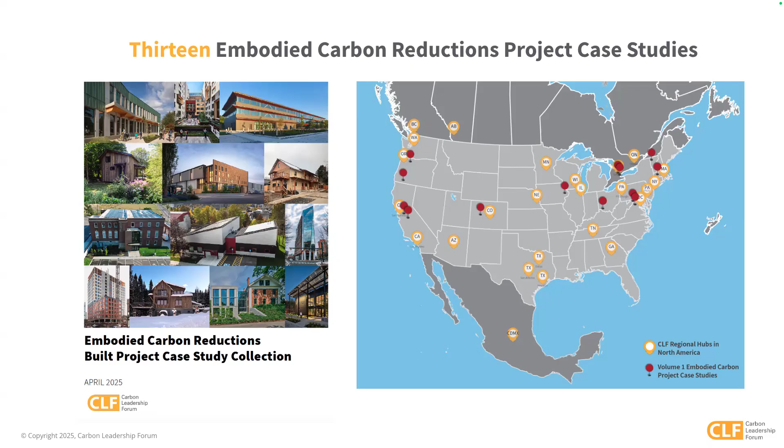So we are really thrilled today to have team members from all of the projects covered in today's webinar. They'll each be sharing their own insights and experiences and their roles on their projects, and in particular, a focus on the process that they undertook to assess embodied carbon and realize reductions in a whole number of different strategies. So I will let each of the presenters briefly introduce themselves when we get to their project.

So the agenda for today is that myself and Sindhu will start with a really brief introduction to the goals and the process of publishing these case studies. And then each project team will give a relatively short presentation. At the end, we'll have time for a Q&A with everyone. So if you do have questions, you can either put them in the chat as we go. If they're easy enough for presenters to answer in the chat, they can do that. And then otherwise, we can hopefully have some time for a conversation at the end.

So I just quickly wanted to put out there why CLF undertook this first ever effort from our organization to publish project case studies, and just kind of understand what some of our goals were for doing this.

So we really were seeing a lot of demand from practitioners, from owners, for real world examples of projects that had been built and demonstrated embodied carbon reduction. So we really wanted to try to do something to meet that demand that we were hearing.

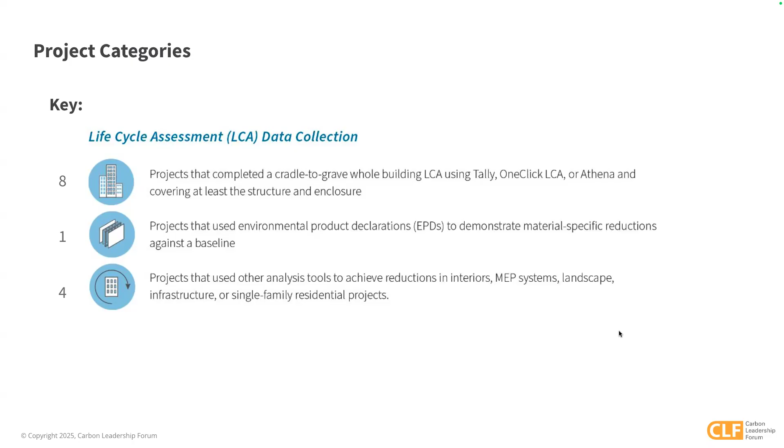I'll pass it back to Michelle to continue introducing the case studies.

Thank you, Sindhu. So as Sindhu explained, you can see that we really got a very wide range of project strategies and types. Most projects used more than one strategy, so it was a really exciting cross-section of many different ways that you can address embodied carbon.

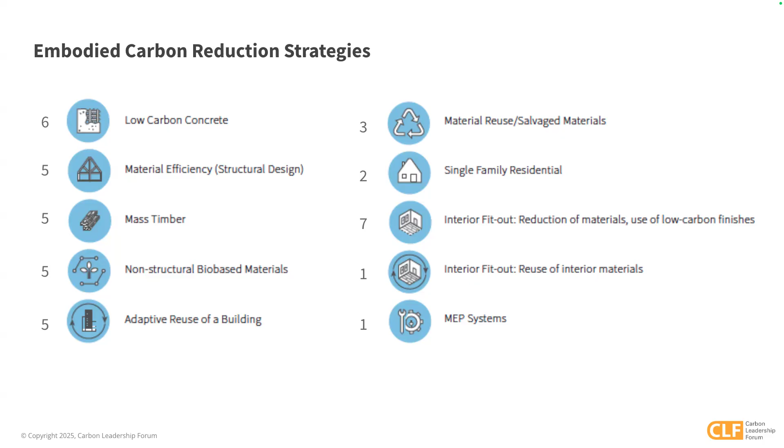We had studied it on a number of projects, either on our own or through the lens of a third-party certification. But Amherst College had just committed to carbon neutrality for their operations by 2030, and they are actually in the process of building a campus-wide ground source heat pump system that's going to power the heating and cooling of all their campus buildings. So they're really walking the talk. This was the first capital project they had embarked upon after making that commitment.

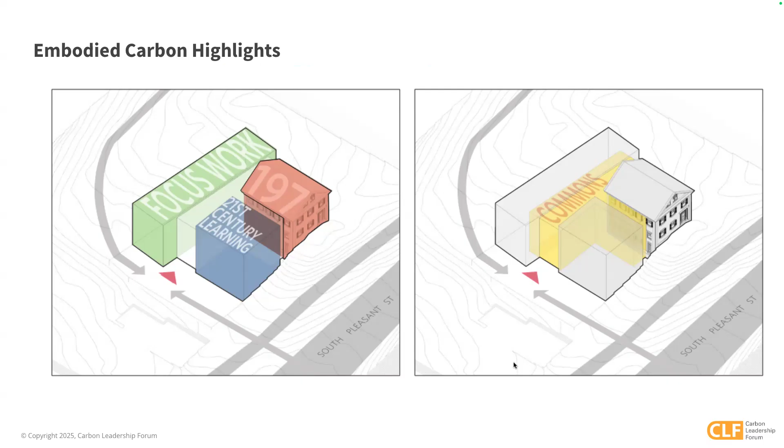Yep, here we go. On the right-hand side, this is where we were able to take advantage of doing some double height space and really use mass timber and express it. Mass timber is fantastic from an embodied carbon perspective, but can be very deep structurally, so we used it in the spaces where we could really accommodate it. On the left-hand side, we used a combination of CLT deck and steel, and set the steel up into the thickness of that CLT deck so that we can make a space that's still institutional scaled, but can meet the floors of the existing building.

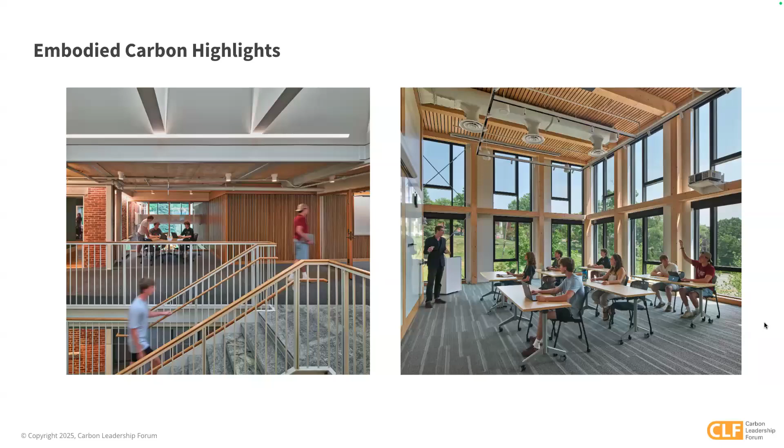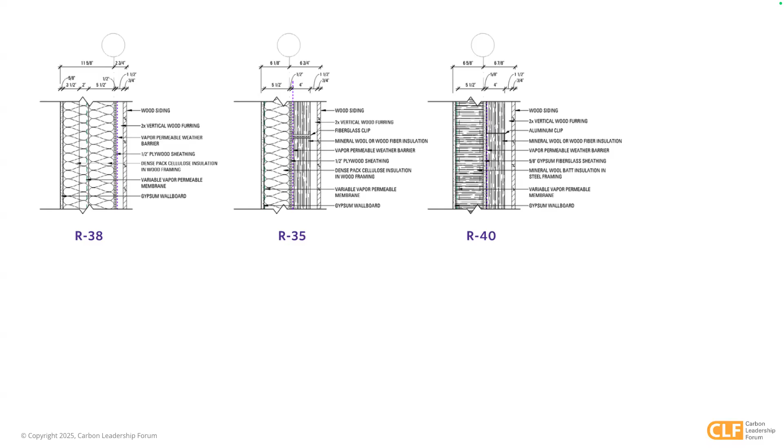If you click one more time, you'll get the preliminary results that we were able to use and work with both our client and our client's envelope consultant, who was very interested in the option on the right. We were able to work with them to figure out how to get to the option all the way on the left and accommodate some carbon storage in the material choices. We had to work through a lot of building science too, to make this wall actually durable. But it allowed us to make that case really strong. So, next slide.

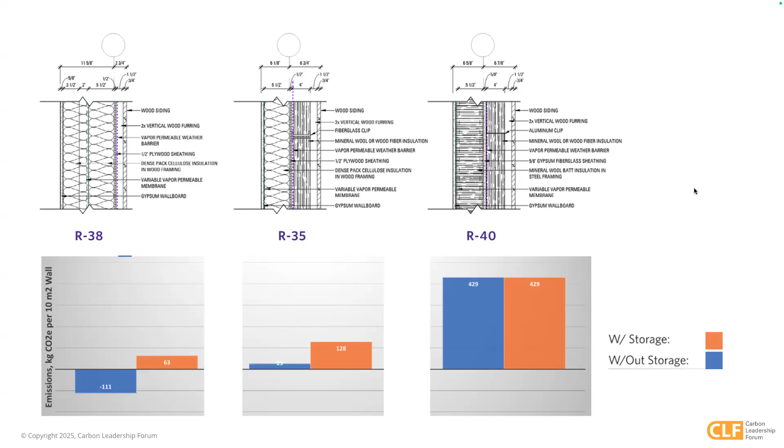We used a bunch of different tools to do this study. At the very beginning, we worked with Beam Tool to do overall analysis. We used Tally during the design phases. And then at the end, we were able to study the interiors using EC3, comparatively picking which products we were going to use. We really focused on the A1 to A3 product stage, because that's the best and highest quality information we have so far.

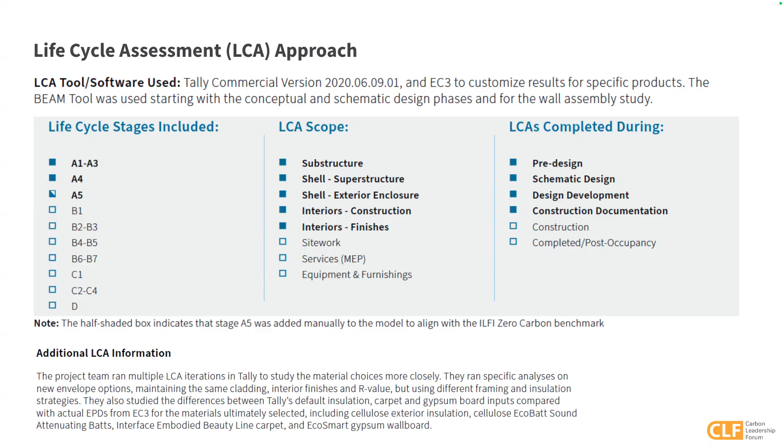And then our results. Like I said, we were asked to consider both operational and embodied carbon on this project. So we were naturally drawn towards the ILFI zero carbon standard as a potential third party certification process. Ultimately, we didn't certify the project, but it helped us set really good goals for both of those performance metrics. You can see the savings that we were able to achieve based off of some baselines. And based off of the benchmark of the challenge, we were still able to achieve major dramatic reductions from that requirement. Next slide.

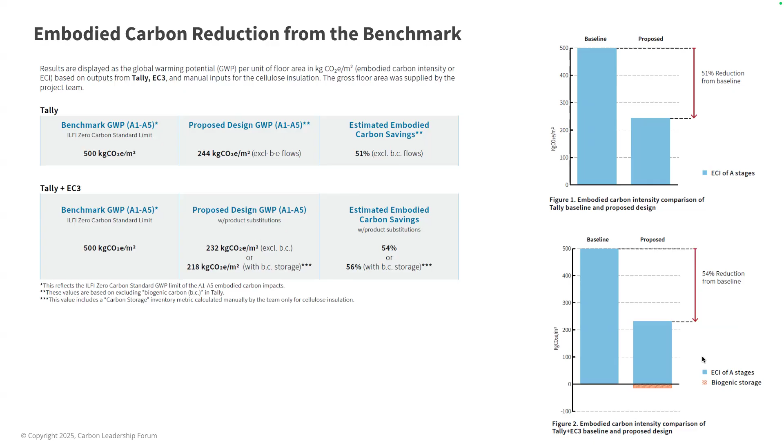So I guess in conclusion, there's a couple of key things. One is that we've thankfully been able to play in this realm for about a decade now, but we're a heck of a lot better at it than we were 10 years ago when we were just trying to figure out how to use the tools. Tools are also a heck of a lot better, and the libraries are getting much better, in no small part due to organizations like the CLF organizing things like this to share that knowledge.

We're at this tipping point where I think we can actually start to trust the numbers now, which is really quite neat. And then the last thing is that this was a really unique situation where we weren't just trying to meet a standard. We were actually being asked by our client directly to study this, which was very fortunate for us, but also really pushed us to consider some things we may not have. It allowed us to partner with folks like Jacob and our other teammates along the way to push ourselves to do better through our design. So, thanks. I think that's the last slide.

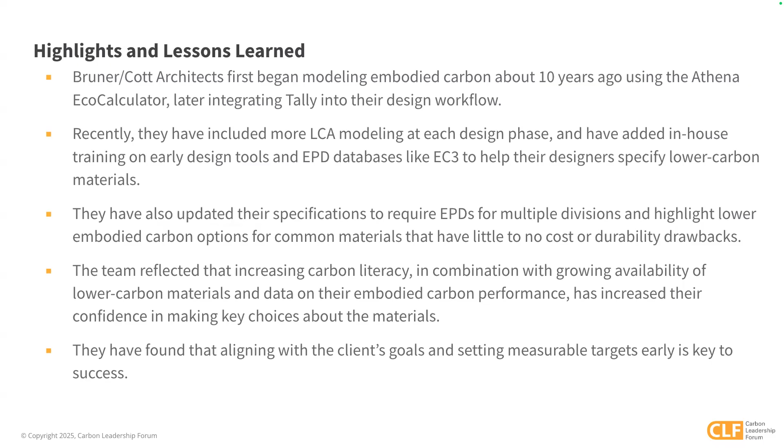Thanks so much. Yeah, Christopher, just wonderful to hear you present on that project. It's thrilling, and I'm honored to be able to share some of New Frameworks' work. I work with New Frameworks, a design, build, and fabrication cooperative located up in northern Vermont. And we have a small residence, the Kaplan Williams residence. Next slide, I'll tell you a little more about it.

So this is a small 1-bed, 1-bath ADU, accessory dwelling unit, that is actually located in the backyard of a residence right in the city of Burlington, Vermont.

The family that was in this residence needed to expand, couldn't really afford to move to a larger home, and in addition, wasn't really the right call for that building.

So an accessory dwelling unit solution became available with changes to Burlington zoning policies that allowed ADUs to be permitted in the city of Burlington to increase housing density in residential sections of the city. We were really excited to provide an ADU solution for this growing, or evolving, family. It also marks a new foray for New Frameworks into prefabricated and pre-designed panelized full home construction, which I'll talk a little more about.

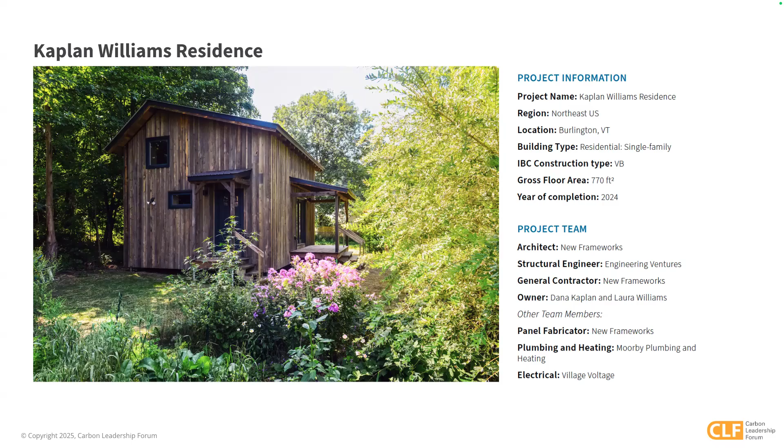So yeah, this is a wee little 770 square foot, single bed, single bath, very lovely and comfortable ADU.

So I'll call out some of the particulars around the construction, and then I'll talk a little more around the panelization and the business model part of it in just a minute.

Compact home is a really big thing. We're really big fans of sufficiency within our company. Often we'll have owners come to us asking to see how much project they can get for their budget, and we typically pivot the conversation to what is the minimum amount of building you need for your programming. That was an ethos that guided the designs of our pre-designed homes, and it feels super relevant in terms of the overall net impact of emissions.

Helical piers are a thing we have really adopted both as a resiliency strategy in our heavily flood-prone regions of Vermont. We're fast approaching, actually we might be on the anniversary of catastrophic floodings for each of the past 2 years. So we've been leaning into flood resiliency approaches as well as foundation designs that minimize the use of concrete.

The panelization work allows us to bring in straw as an insulation material and to work with local wood in a really cost-effective manner. I'll fill out more of that story in the migration to panelization in our company, but we're able to use organic straw as an ag residue for the insulation for the majority of the buildings, so wood fiber insulation, and we go pretty far out of our way to source locally milled wood products from sustainably managed forest lands whenever possible.

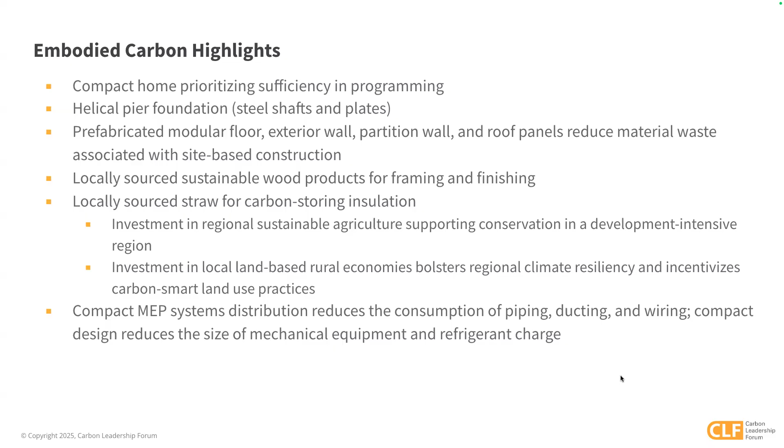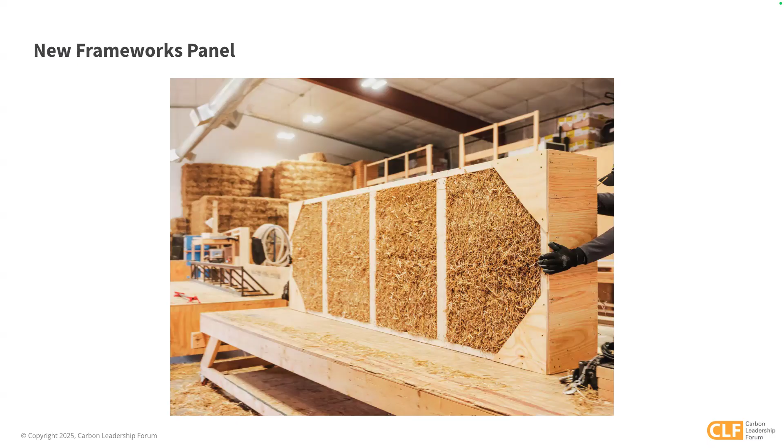Just want to give you a picture of what a straw panel looks like. For all practical purposes, you can just think of a double stud box stuffed with straw. So if that's your walking-around mental model, what we're looking at here is the interior that is ultimately covered in a vapor variable airtight membrane. No one need know there's any straw in the box if that proves more of a liability or concern rather than an asset. In our case, it's an asset, so it's an effective way to store biogenic carbon in the built environment. We lean into that while also supporting local organic farms within our supply chain and working with a working landscape conservation model in our rural communities. But there's a picture of a straw panel in case you were confused as to what that is.

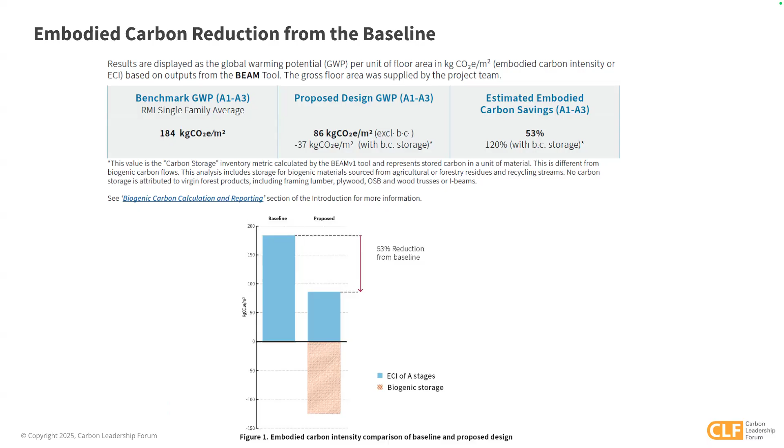So I guess just to wrap up with the lessons learned and highlights here, I won't read through each one. I touched upon the more technical details a couple minutes ago. The thing I'll name is that New Frameworks made a really intentional choice a number of years ago, maybe close to 5 years ago, to pivot from being custom design builders doing all custom construction to becoming a fully panelization company.

That pivot from custom construction to prefabricated construction, combined with our design team's work, has allowed us to deliver high performance carbon storing building solutions at a much lower cost point with way less friction to way more clients. It's been really exciting to see how the combination of prefabrication, high performance construction, and local bio-based natural building technologies have all been able to optimize in these pre-designed and fully panelized homes, such that we're able to meet the demographics of our working class rural communities, using local materials and providing carbon storing buildings. I'll leave it there.

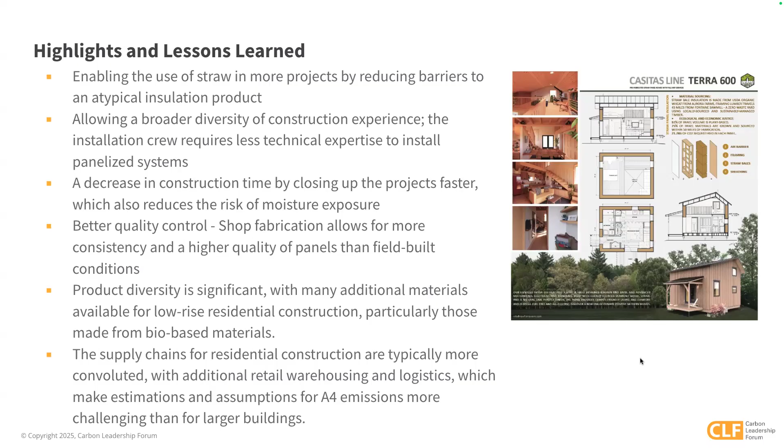So staying on the theme of bio-based materials and straw bale construction, I will hand it over to David Arkin to talk about Oceanspray Townhomes.

All right, thank you Michelle. Thank you everyone for joining us today. I'm a principal at Arkin Tilt Architects based in the San Francisco Bay Area. Part of our Bay Area CLF chapter, I was with CLF early on as a co-chair of the Renewable Materials Task Force. So early on, CLF had a focus on these carbon storing plant-based materials. I've also served 10 years as the director of the California Straw Building Association, the AIA's 2030 commitment, and represented AIA on the ECHO project.

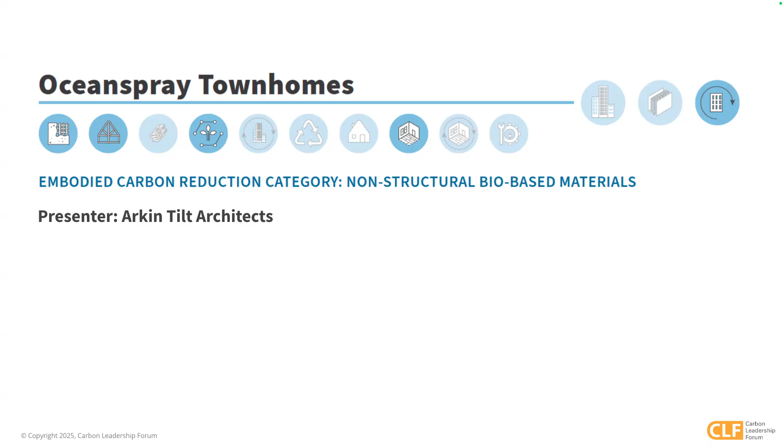Today I'm thrilled to talk about a recently completed and occupied project of ours, the Oceanspray Townhomes in Ashland, Oregon. It's a 2.5-story, 4-unit development. What you might call the missing middle, in that it's that low scale, mid-rise infill housing in a largely residential single-family neighborhood, but adjacent to Southern Oregon University where there is some student housing in the area. I think it represents the right scale as well as a number of carbon storing and other features in addition to the story we're about to tell.

The project does feature 7.2 kilowatts of photovoltaics, so it is zero operating carbon, and also has a 10,000 gallon rainwater storage, which the units all use for their toilet flushing.

So just to highlight some of our embodied carbon efforts, I think most significantly, and Jacob outlined this well with their project, the ability of straw as a plant-based resource to store carbon cannot be understated. We grow enough grain straw worldwide, I think it's 2.16 billion tons, which is enough to not only replace all of our insulation materials, but in doing so, we would offset all of the global transportation emissions. So we're quite excited about this particular resource.

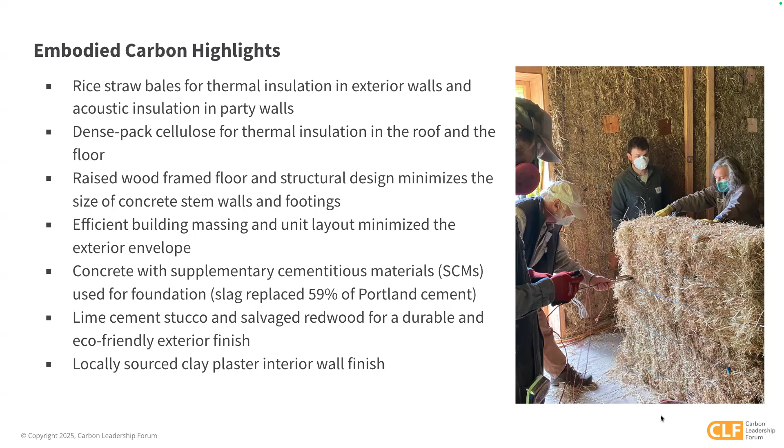I think the most significant story here is perhaps around the concrete, where we worked closely with the concrete subcontractor and the local supplier who had never done a low carbon concrete mix. Using some other information from the Portland area and state of Oregon, we convinced them to do a sample using a 59% replacement of Portland cement. In preparing that sample, the concrete subcontractor not only found it more workable, but really became an advocate for these low carbon concrete mixes. So that was an exciting win for the whole team.

So our focus was largely on the upfront carbon emissions. Like the new frameworks project, we use the BEAM calculator, that's building emissions accounting for materials, and we find it a very useful tool for this scale of building. We go into a project with some understanding of what measures are most effective, then do that measuring once we're in construction documents and can make choices to further reduce those emissions. Again, we focused on A1 through A3, but that's where the bulk of the emissions for the entire life of the project take place.

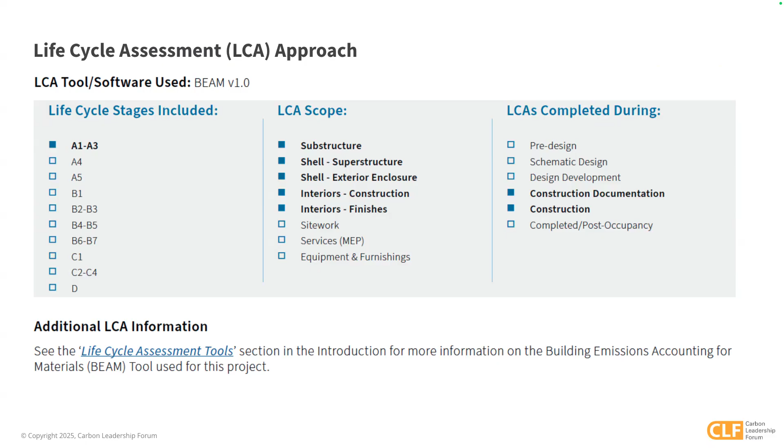So looking at the reductions, I think there are two points to be made here. The first is that our modeled baseline is starting a lot lower than some of the others we've seen here, and that's again due to that envelope efficiency and some of those design measures taken. Then with the lower carbon concrete and some other choices, we're able to achieve an 18% reduction.

But when we look to the biogenic storage and start at an average of 200, we're actually looking at an 87% reduction when we account for that biogenic carbon. I think the second point here is that these bio-based resources are storing carbon now, and that's when those emissions are having the greatest impact on our climate. There's a lot of discussion of what happens at end of life, and I think the options of reuse or biochar need to be considered seriously.

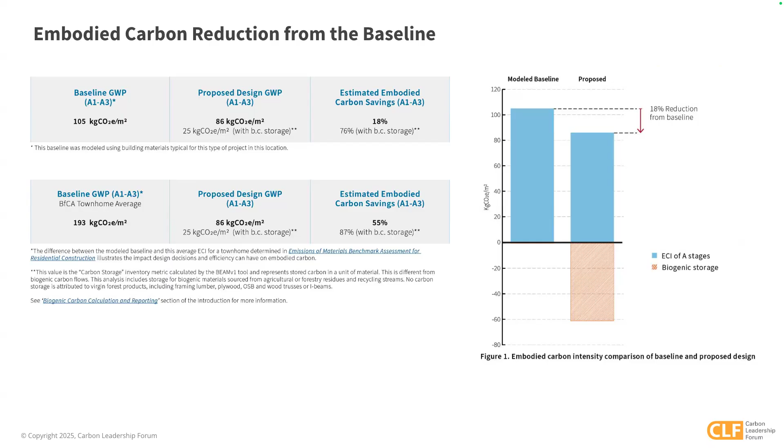So just to wrap up with our highlights and lessons learned, I think we found that we could bring this bio-based resource to a multifamily scale. The wall system was embraced by the contractor, who had actually never built with straw bale before. Our clients were on board mostly for its thermal performance, but also with our efforts to reduce embodied carbon in all the different ways, including integration of salvaged wood resources. I think we're really looking at this as a demonstration to take it to larger scale. Jacob mentioned panelized construction, but I think these hybrid systems like we used here can also have a role in long-term reductions. Thank you.

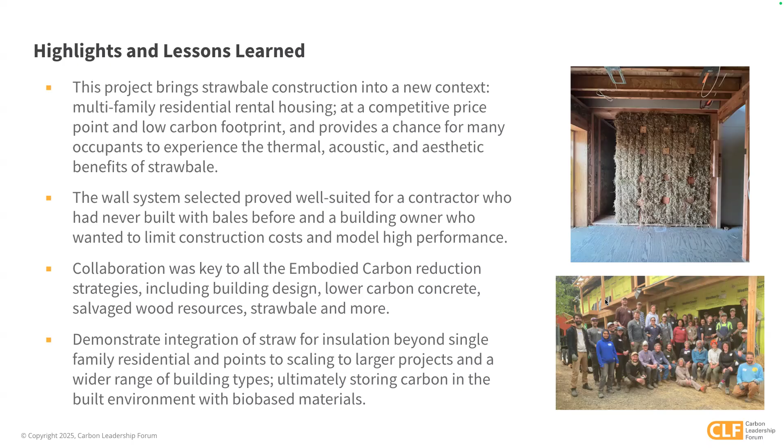Great, thank you so much, David. Really fantastic to hear about this project.

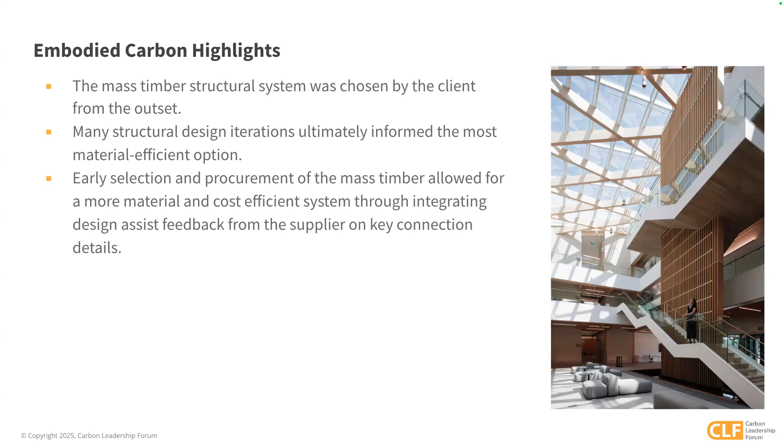For the LCA, we used One-Click. We ran it from A1 to A5, on the envelope and structure. It was completed post-occupancy, with the shop drawings and completed building drawings, which was very interesting for us because during the design period, we worked with a group from University of Toronto who had done a quick bay study, an embodied carbon bay study, during the design process. It was interesting to see how the full building post-occupancy LCA was telling us different things or matching in some areas - it was a good process.

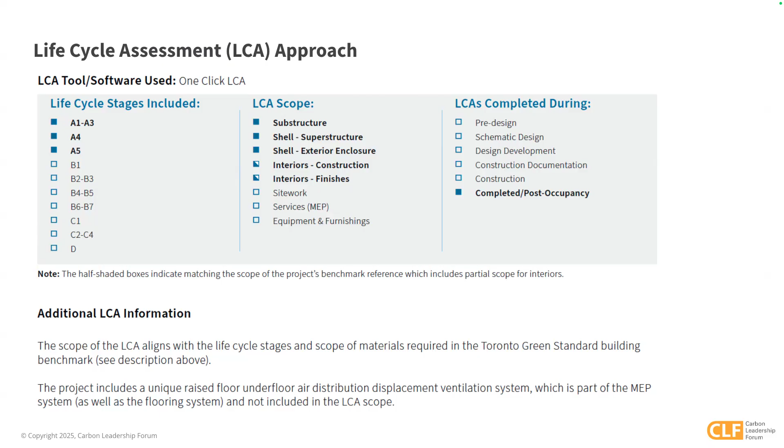It's also interesting to note that we used CLT for the exterior wall backup in some areas beneath the glazing, and that also helped us reduce the embodied carbon compared to your typical exterior stud wall framing materials, which we found to be beneficial.

In terms of the baseline, the city here in Toronto has a Toronto Green Standard guideline, and it's a tiered standard. Tier 2 benchmark is 350 kilograms of carbon per meter squared. Tier 3, which is more restrictive, is 250. This project complied even with the more restrictive tier at 205 kilograms of global warming carbon emissions per meter squared - better than tier 3 by 41%. If we include biogenic storage, that's another 140 kilograms of carbon reduced, bringing us down to about 66 per meter squared.

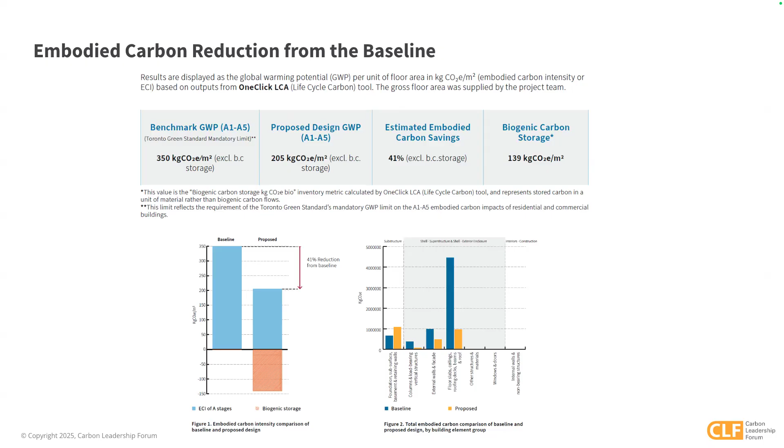One of the lessons learned is that the concrete and the steel were major contributors to the embodied carbon. I'm sure everyone here could have anticipated that.

Some of the more nuanced outcomes were that we had awnings to reduce solar heat gain. We wanted to provide a lot of daylight for the building's occupants, reducing lighting loads, but we also wanted to control heat gain. The awnings were a way to control that, but the embodied carbon cost for the framing of those awnings was something we wanted to be mindful of. Going forward, we'd like to understand how much the mechanical units were downsized due to avoided cooling costs, and really compare that to the embodied carbon for the framing of the awnings. Once we get a bit more data available for the mechanical side in terms of EPDs, I think we're close to being able to run that analysis.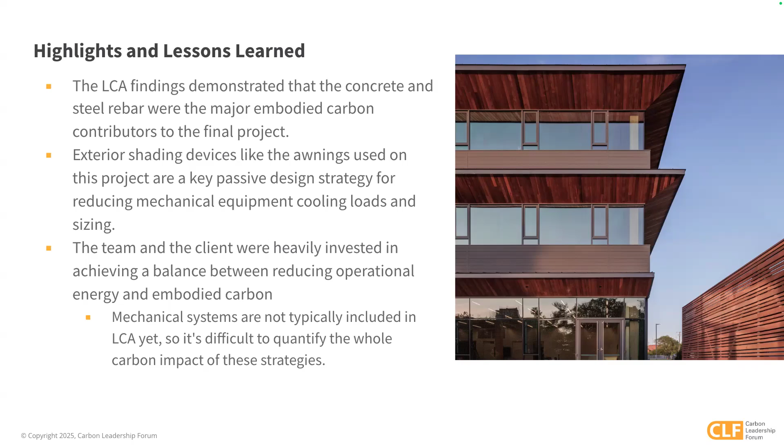Great, I think that's the last slide. Oh.

Just a final note, it was kind of great to work with clients who were focused on a number of metrics - financial responsibility and sustainable responsibility, but also care for the building's occupants. Mass timber really helped achieve all of these metrics, low embodied carbon and low operational cost for the users and the owners. It was interesting for us to participate in that process.

So thank you. Great, thank you so much, Kathy.

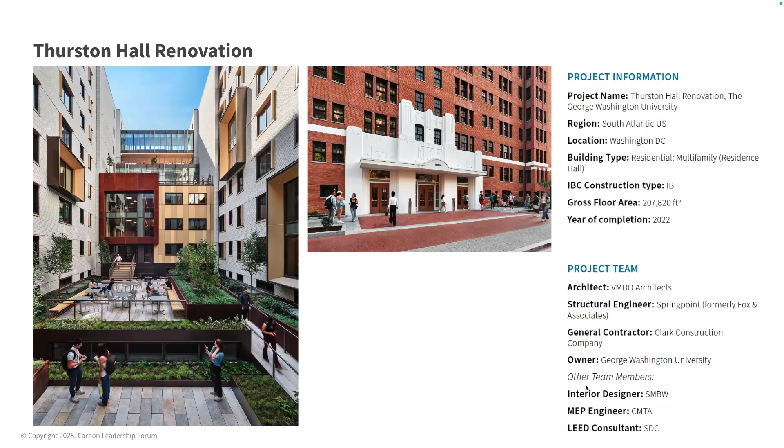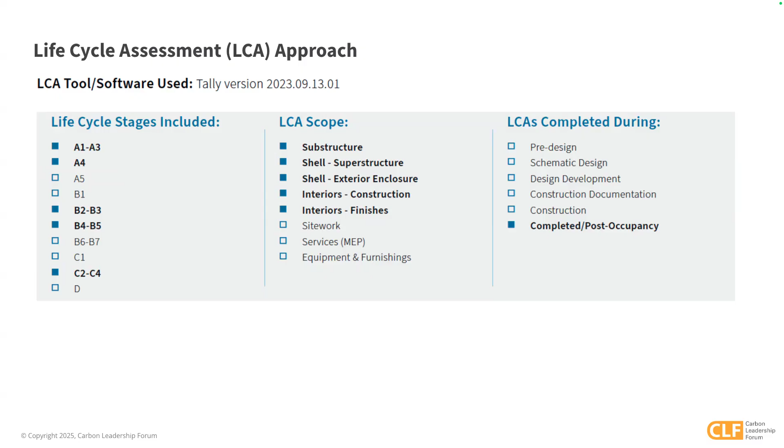So it's really successful in that way, but from a carbon standpoint we didn't do anything special. At VMDO, we've been doing a firm-wide study of all our buildings looking at embodied carbon, and Thurston was one of the projects we ran through Tally just to see how we're doing as a firm, and what it looks like when we're renovating buildings. We ran it through Tally looking mostly at A1 through A3, but included some other scope as well. What we found was really exciting.

This gets a little technical based on how you define your baseline. The baseline in this case is: what if we built Thurston Hall, 1929 style with brick masonry bearing walls, today? That would be your baseline GWP. And we had about a 29% savings over that baseline.

But what was really exciting to us was looking at our new builds—what would it be like if we built Thurston new? There you're looking at about 607 kilograms of carbon per meter squared compared to 272. So by just reusing the structure, we were making really huge improvements compared to the alternative. That was super exciting to us.

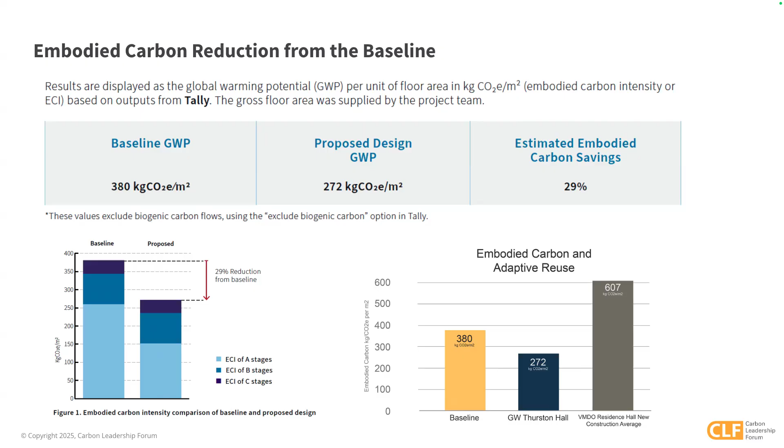In terms of how we did that, reusing the structure was important, but there was also a lot of additional concrete going into the building for the structural gymnastics necessary to open it up and deal with old conditions not up to current code. There we used a concrete mix that was about 40% slag—actually looking at the submittals it was a little better than that—but this was in Washington D.C., and that's nothing crazy for D.C. It's a pretty standard mix, something we always push for on our projects, nothing super crazy there.

We used mineral wool insulation instead of foam, insulating from the interior of the historic building. But again, pretty standard practice for us.

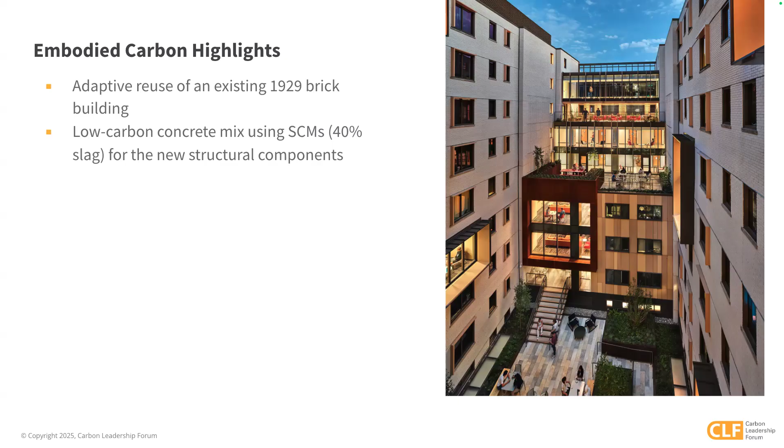What's really exciting about this project is it shows that building reuse really is climate action—you can meet your design goals and sustainability goals, and also save on embodied carbon by reusing existing structures. So for VMDO, I view this as a starting point. This is like how good can we be without really trying?

It's super exciting to see all the other projects and the great ways that when building new, you can reduce carbon through your envelope, insulation, etc. So I think the next step for us is taking those lessons, understanding we want to advocate for reuse with our clients whenever possible, and then pushing that envelope a little bit. Really excited to dig into this project with CLF, look at work we had built and evaluate it, and excited for the future as well. Thank you.

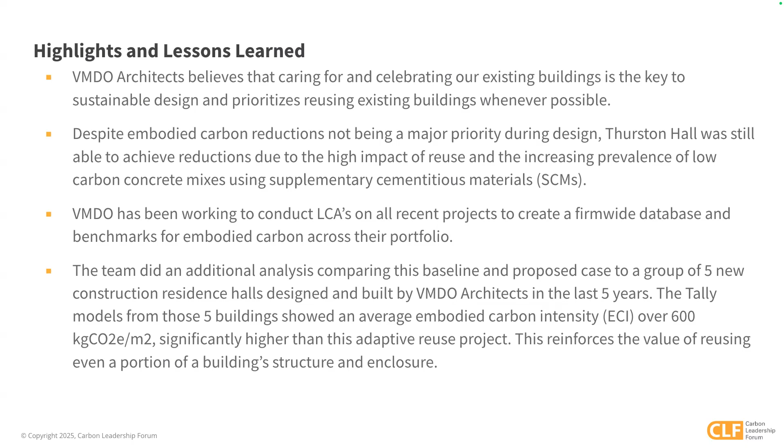Thank you, Tyler. I hope this demonstrated to everybody that reductions are possible across any scale of project, with so many different strategies and really exciting creative ideas across all these projects. Fantastic job on timing to the presenters.